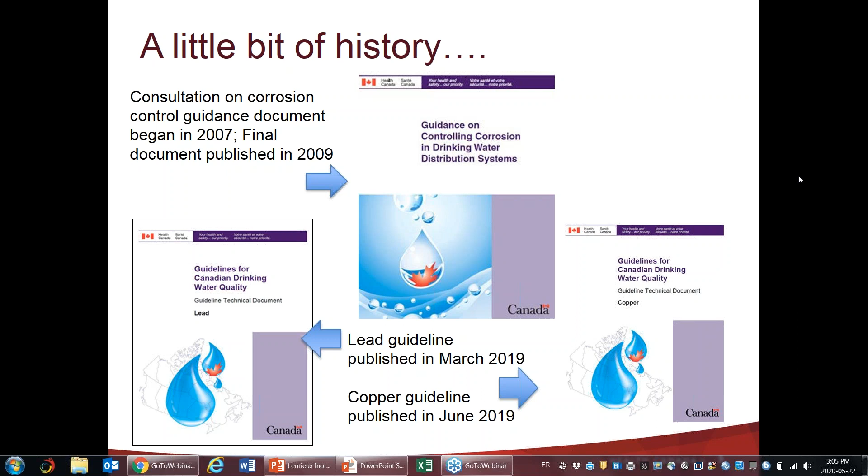Again, sorry, you have to be patient with me.

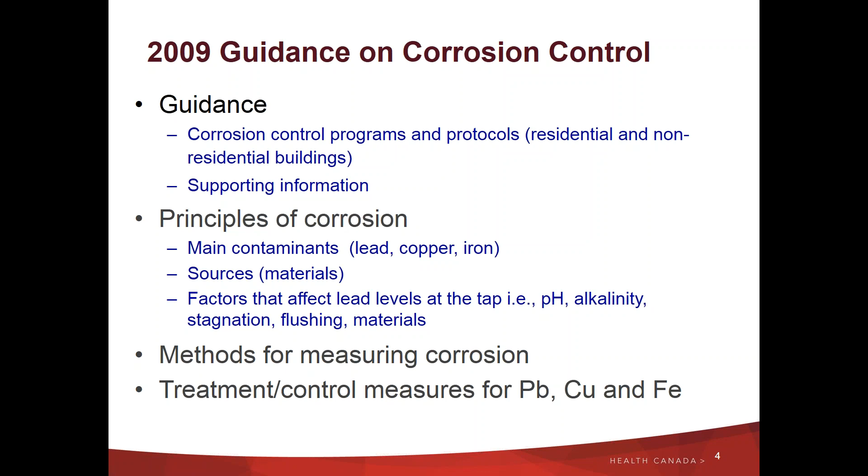So in terms of our 2009 guidance on corrosion control, it provides guidance on corrosion control programs and protocols, including for residential and non-residential buildings, as well as the supporting information behind that. Some of the principles of corrosion, such as the main contaminants that we focus on, which are lead, copper, and iron. We look at the sources, some of the factors that affect lead levels at a tap, for example pH, alkalinity, stagnation, flushing, and the materials, and methods for measuring corrosion, as well as treatment and control measures for lead, copper, and iron.

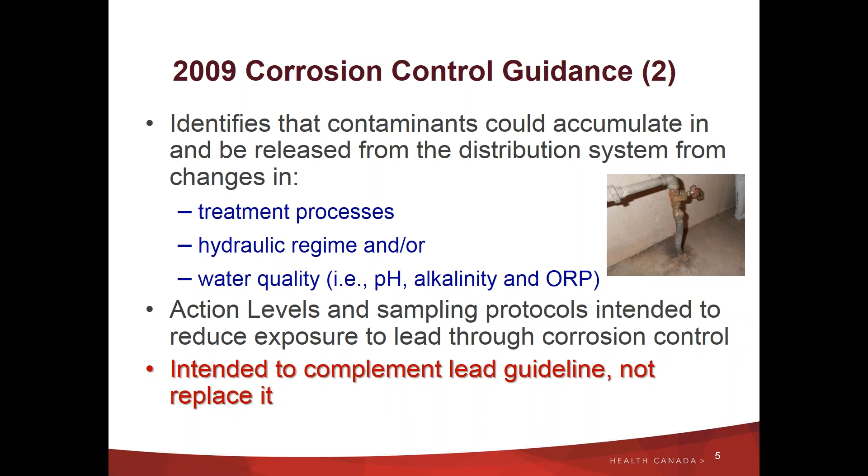The other thing that we've done is identify contaminants that could accumulate and be released from the distribution system, resulting from changes in treatment processes, hydraulic regime, or water quality. We also included some action levels and sampling protocols intended to reduce exposure to lead through corrosion control. So it was not a direct impact on lead in the sense that it wasn't part of a lead guideline, but those action levels and the protocols are intended to try to reduce those lead levels. And then, as I was mentioning, it wasn't intended to replace the guideline. The guidance itself was intended to complement that lead guideline.

And that's key here. In the US, it's a treatment-oriented rule. For us, we have a lead guideline, which is health-based, and we have the corrosion control guidance to help achieve that guideline. So what's driving the need for change here?

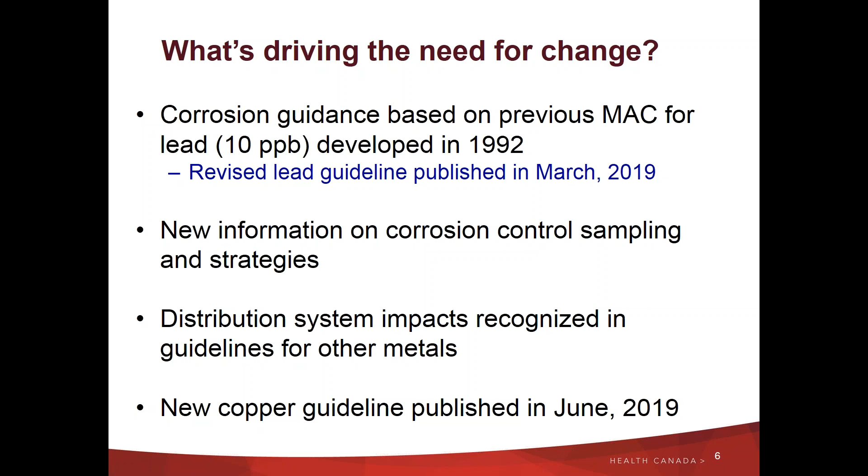Well, our guidance was based on the previous maximum acceptable concentration for lead at 10 micrograms per liter, and that was developed in '92, as I mentioned earlier. And we revised that lead guideline, and that was finally published in March 2019. We have new information on corrosion control sampling and strategies. There are distribution system impacts that were recognized in guidelines for other metals. We had addressed it somewhat in the guidance previously, but there wasn't as much information as there currently is now out there. And there's a new copper guideline, as I mentioned, that was published in June 2019.

So our guideline for lead, we've gone now to a MAC of 5 micrograms per liter, and we're looking at sampling for typical exposure at a populational level. And all of our guidelines are based on a typical exposure. So this is not unusual for lead. It is just the policy decision that was made some time ago for all of our guidelines. That lead guideline includes things like factors affecting exposure, some of the sampling considerations. We address lead variability, and in particular particulate and dissolved lead, as well as some of the monitoring considerations.

Just a little bit of a refresher in terms of the health effects for lead. We're looking at it as being an internationally accepted non-threshold toxicant by many agencies, Health Canada, US EPA, and CDC included. No safe level has been established for lead in children's blood. Lead exposure is associated with many health effects, but decreased IQ is considered the critical effect. I know there is some discussion within EPA, I believe, that there are cardiovascular effects. Those are well known, but the lead exposures that are most critical that we see are from the IQ decrease. It has the strongest evidence for a causal effect, and children have been seen to be affected even at the lowest blood levels that have been studied.

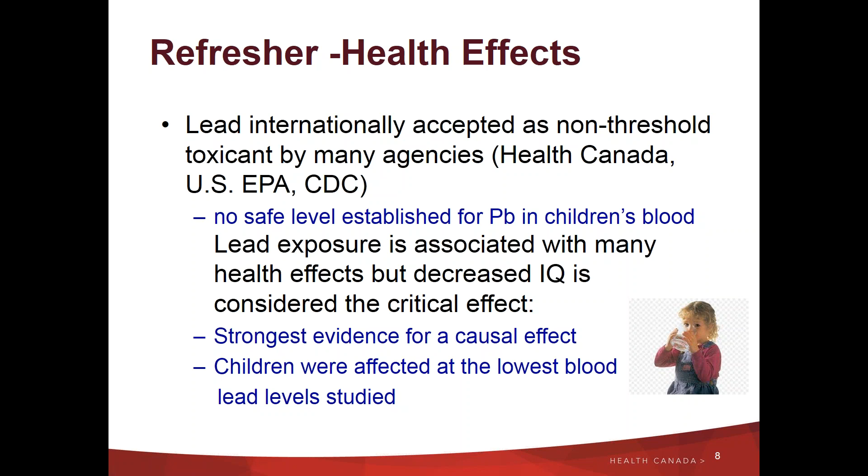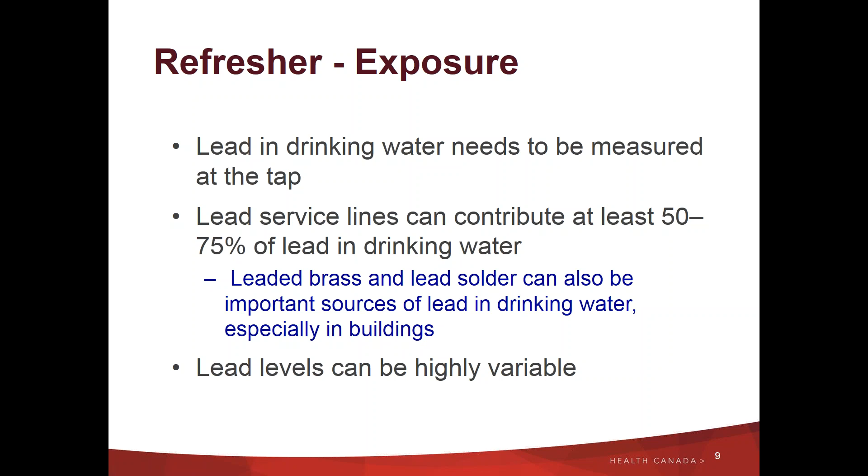In terms of exposure, we know that lead in drinking water needs to be measured at the tap if you want to get an idea of what people are exposed to. It's been published that lead service lines can contribute anywhere from 50 to 75% of lead in drinking water, and sometimes maybe more. But that doesn't exclude leaded brasses and lead solder, which can also have an important impact on the lead concentrations in drinking water, especially in buildings. And lead levels can be highly variable.

In terms of sampling for our lead guideline, we looked at different sampling protocols, and because different sampling protocols will achieve different objectives, you need to think of what it is that you're trying to achieve, because that's the important thing—what are you looking at, what answer are you trying to get? And some of those protocols may actually achieve more than one objective, which is great in some senses and can be confusing to some people in other senses.

Sampling protocols will depend on whether you're looking for exposure, and whether it's an investigative or diagnostic type of sampling, what your treatment performance is like, and compliance may have different sampling objectives than any of those other protocols.

Sampling protocols should also capture the variability of lead because exposure varies, and it needs to capture total lead, both the dissolved and particulate fractions, because if you're ingesting lead, your body does not make that distinction. You have a very acidic environment in which you ingest lead, so the assumption is that there's a potential to absorb all of it, whether particulate or dissolved.

In terms of factors affecting lead release, there are many of them, but typically they vary between particulate and dissolved. Dissolved lead is based on water quality, and quite often the surface area of a lead surface—pipe length, diameter, stagnation time of water. The release of dissolved lead is reasonably well characterized, though not completely.

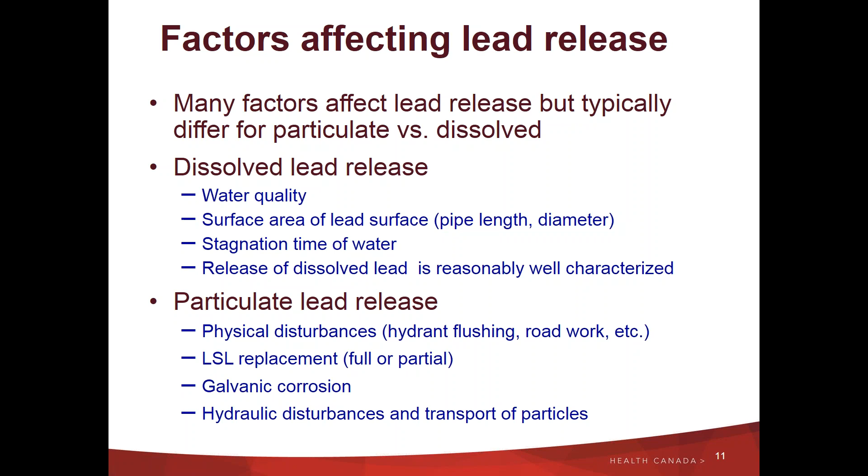Whereas particulate lead release is based mostly on physical disturbances—hydrant flushing, for example, road work, lead service line replacement, whether full or partial, galvanic corrosion, and hydraulic disturbances and the transport of particles. Some of these things seem obvious, but others are not as well characterized, and you may get particulate lead release without any idea why it's happening. So it's less well characterized.

So what are we looking at in terms of our update on the corrosion control guidance? We're looking at protocols for assessing corrosion control. Our primary focus is going to continue to be on lead. It's not the only focus, but it is the primary focus in terms of the protocols themselves.

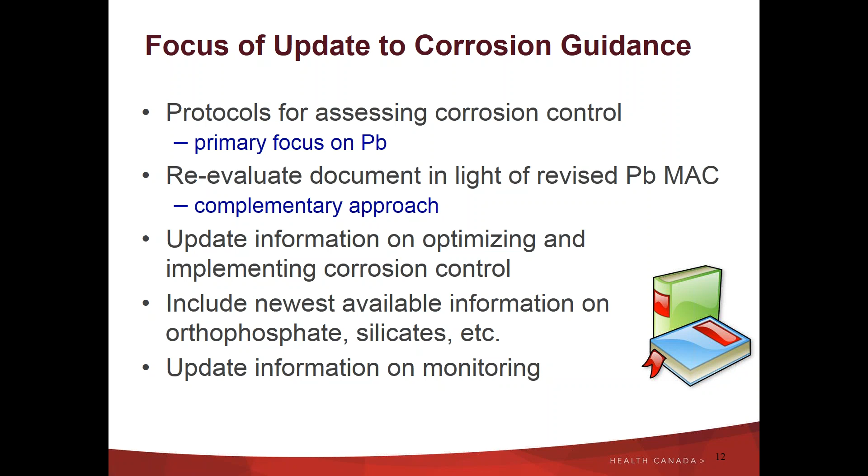We're reevaluating the document in light of the revised lead MAC, so it has to be a complementary approach. We're looking to update the information on optimizing and implementing corrosion control, including the newest available information on orthophosphate, silicates, anything else that's out there, and updating information on monitoring.

We are also looking to see if the 90th percentile action levels are still appropriate. Do we need to relook at them? Are they even something we want to keep? So those are the types of things we're thinking about.

We're looking to update the information on sampling for different objectives. We'll look to expand the random daytime sampling information and the UK experience, because they have a significant amount of information out there on their experience with random daytime sampling.

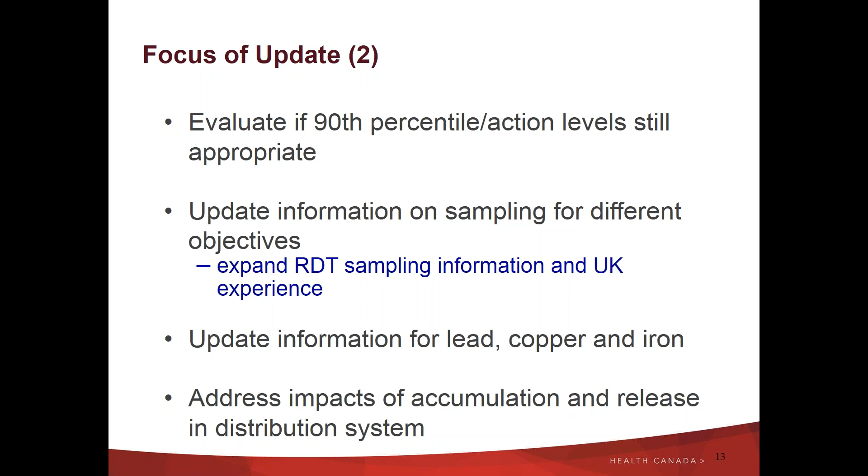We're looking to update information for lead, copper, and iron, because those are three of the contaminants included here that have had a significant number of changes.

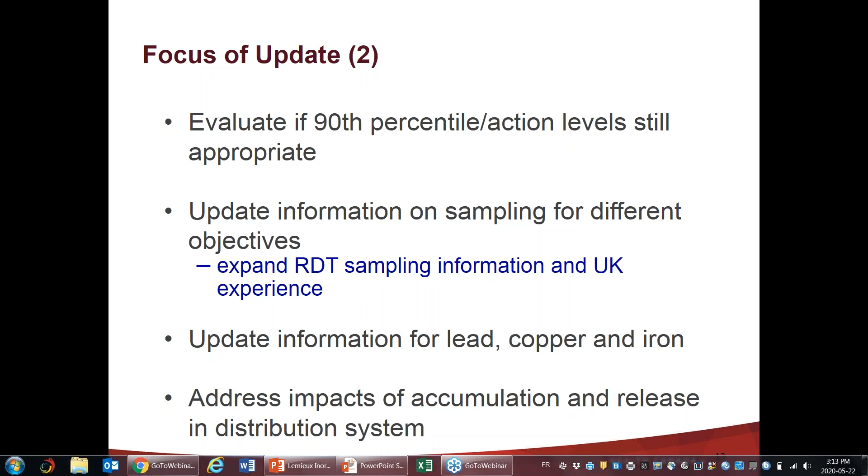We're looking to address impacts of accumulation and release in the distribution system, simply because there has been a significant amount of information come out lately, or in the last few years since we published, that has an impact. We're also looking to make sure we highlight the correlation between particulate lead and metals, and that metals can accumulate on top of iron and lead in the distribution system.

Iron and manganese scales accumulate lead as well, so they can be released after full or partial lead service line replacements, and that's going to be important information to include in that document, as well as the increased release of particulate lead. We have a lot more articles out there, a lot more data that supports that information.

And also getting back to the tenet that red water or discoloration events need to be monitored because they're not innocuous, because of this correlation between the lead and the metals, between the particulate lead and iron in particular. So it's something we've had as a philosophy in the past, to make sure people understood that it's not just iron, but it's been a little bit more low-key, I think, across the board, and we've tried to highlight that a little bit more to make sure people understand it's not just iron that's in there.

So what else are we going to be including in this revision? We're looking to reinforce the need to monitor in the distributed water, that is, at the tap. Again, emphasis on the need to address discoloration events because they are potential indicators of potential release of other contaminants, including radiological and other metals.

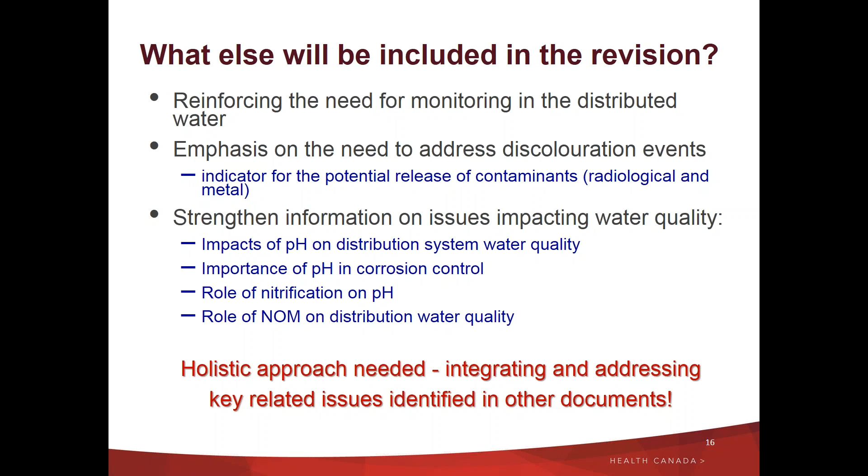Need to strengthen the information on issues that impact water quality—the pH of the distribution system water, the importance of pH in corrosion control, the role of nitrification on pH, which we had previously addressed but I think we need to go back and make sure that's complete, and the role of NOM, the natural organic matter, in water quality.

So really what we're looking at is a holistic approach in addressing these key related issues that have been identified in other documents as we've progressed through them in the past. In terms of monitoring, we're still looking to address residential sites, including single family and multi-dwelling residences.

We need to consider what's practical, what's acceptable by the consumer. We should include buildings and schools, making sure that we're capturing those vulnerable populations. They were previously included, but we're keeping that and adding information that's changed since then. They also have different challenges than a residential setting in terms of fittings, faucets and bubblers that you might have to address.

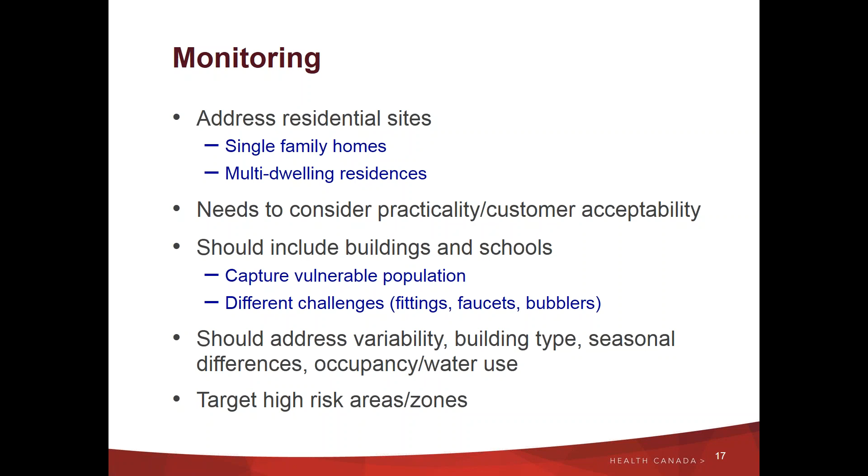Looking to address the variability, the building type, seasonal differences, occupancy, water use, again updating that information in terms of monitoring, and then targeting high risk zones and areas.

In terms of monitoring, looking at the sampling type, the locations and the numbers to identify priority sites and locations. Homes with lead service lines, whether full or partial, need to be prioritized. Provide guidance on site selection when you can't sample at homes with lead service lines.

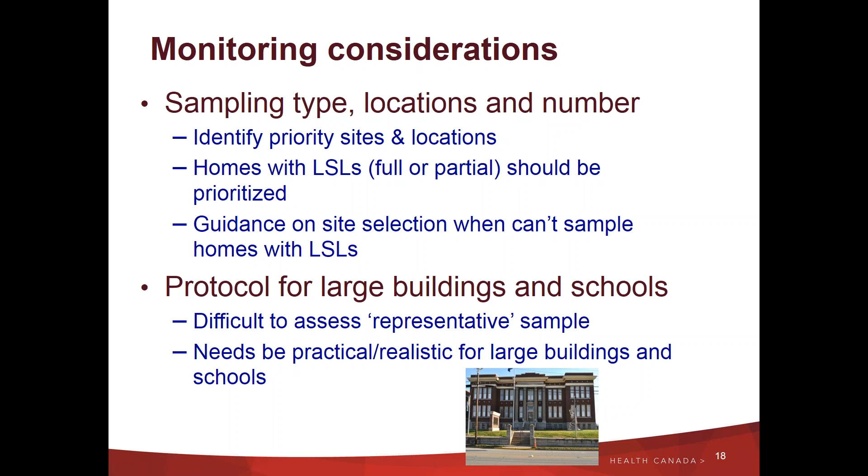Protocol for large buildings and schools. Large buildings - I'm not talking about office buildings. We're not looking to drive corrosion control just for a larger office building, but some of these buildings have children in them, so we're looking to make sure that they're captured where they need to be. But in the concept of the lead guideline, we found it difficult to assess a representative sample, so it's one of those things we need to make sure we're doing a good job with respect to corrosion control. Again, it has to be realistic and practical for these larger buildings.

In terms of sampling results, we're trying to address that in the guidance document and help people understand that what a sample result can tell you really depends on how it was taken - whether it was a 6-hour first or second draw, 30 minutes first or second draw, 5-minute flush sample, randomly timed, or a profiling sample. They all achieve different objectives when you do those types of sampling.

And then we'll be looking at strategies to reduce lead. Obviously the big driver is full lead service line replacement as the best approach, recognizing that it's not feasible to do in a very short period of time. This is a long-term plan.

Partial lead service line replacement can reduce lead, and we want to make sure we get that message across - it may cause release of lead for several months afterwards, and that reduction might not mirror the percentage of line removal. So if you remove 50% of your lead service line, that does not necessarily mean you will get a 50% reduction in the lead concentration you get at the tap. So those key messages need to get across to make sure we try to promote full lead service line replacement as best as we can.

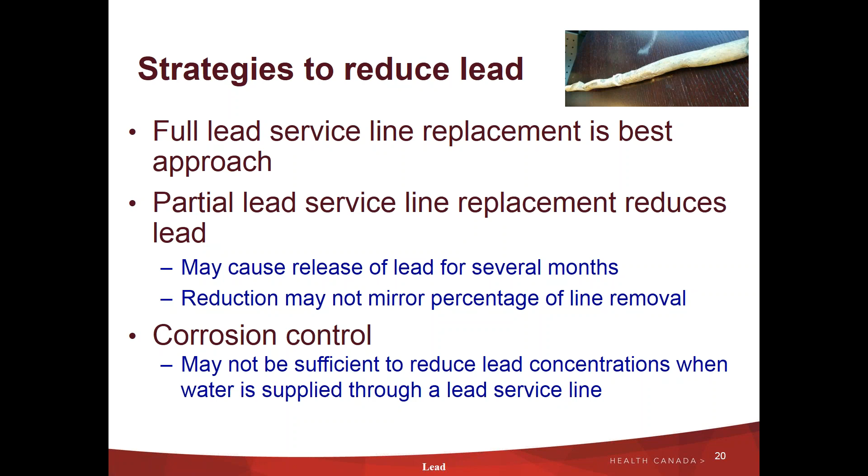In terms of corrosion control, there's recognition that it works reasonably well for a lot of situations, but in some cases it may not be sufficient to reduce lead concentrations when water is supplied through a lead service line. We know this is a very challenging situation and a very challenging thing to do, and we're trying to make sure people understand there are things they can do. The guidance will try to capture those essential elements, but sometimes it may or may not work depending on the water quality and a number of other factors.

Other things we've recognized in terms of strategies for reducing lead - sometimes you may have to go to things like low lead materials, which can be costly and difficult. So it's not our first go-to, but it's part of the strategy going forward, things they can look at to see what they can do to reduce exposure to lead.

We've recognized that filters work well. They are a temporary measure, and they need to be certified by a third party as meeting the appropriate standard for reducing lead under the NSF set of standards. For those not aware, the NSF standard now includes a reduction to 5 micrograms per liter of lead or less. We were able to get that as a committee change to mirror things going on in both Canada and the EU, driving towards lower levels, and also with respect to issues happening in the US, people wanted filters that would reduce lead levels lower. The key messaging, of course, is that maintenance of these filters is essential.

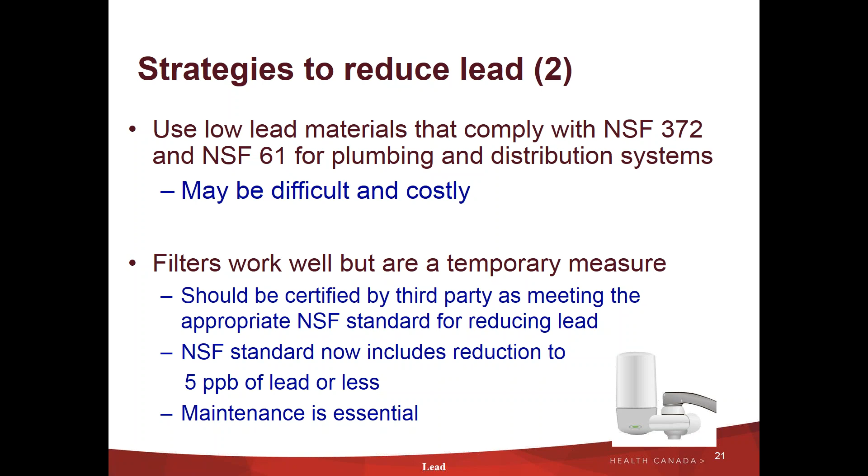So what's next? We're hoping to get a document out to public consultation in early 2021, and we're working on the revision of the guideline, which is expected to start sometime in late 2021.

So we're not there yet, and I say guideline because I'm not sure if it's actually going to have a health-based number or not, but it may be a guidance document. It will depend on whether there are any health effects identified. At this point in time, it doesn't appear to be a driver, but I use that as a generic term, an iron guideline. We'll leave questions for afterwards.

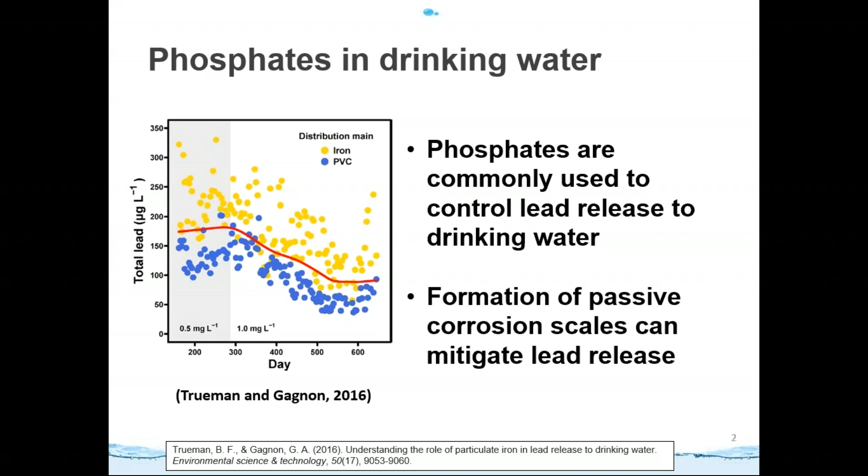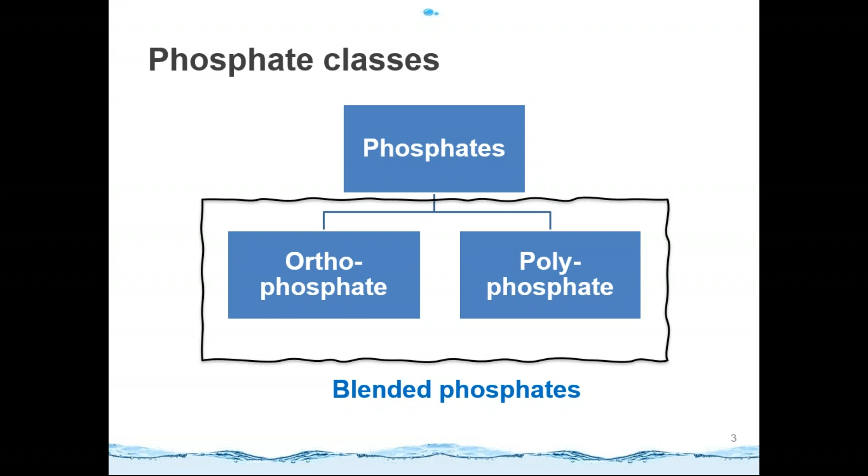As we know, phosphate has been widely used in corrosion control in the drinking water industry, and the major mechanism is to form a passive corrosion scale on the surface of the lead pipe. When we talk about phosphate, in general it can be divided into two categories: the first is orthophosphate, and the second is polyphosphate. In commercial products, we call it blended phosphate. Orthophosphate contains only one orthophosphate unit.

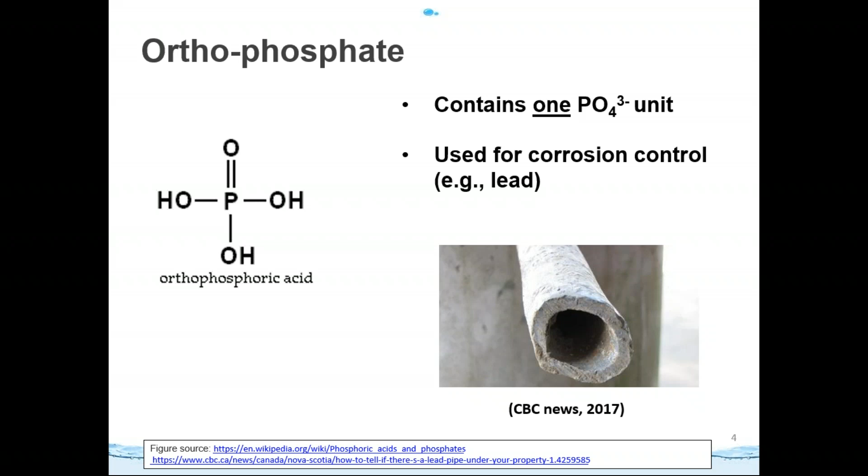Orthophosphate is commonly used for corrosion control. But polyphosphate has a lot of different species, and it contains several orthophosphate units, and it's usually used for sequestration to solve color or turbidity problems caused by iron and manganese. But the disadvantage of using polyphosphate is that it may increase lead release through complexing lead with the polyphosphate molecule.

So to the sodium silicate: sodium silicate is well understood for sequestering in drinking water, like the color and turbidity problems caused by iron and manganese. But sometimes water utilities also use sodium silicate to mitigate lead release. But due to very limited data and studies, sodium silicate is not widely used in the drinking water industry, especially for corrosion control.

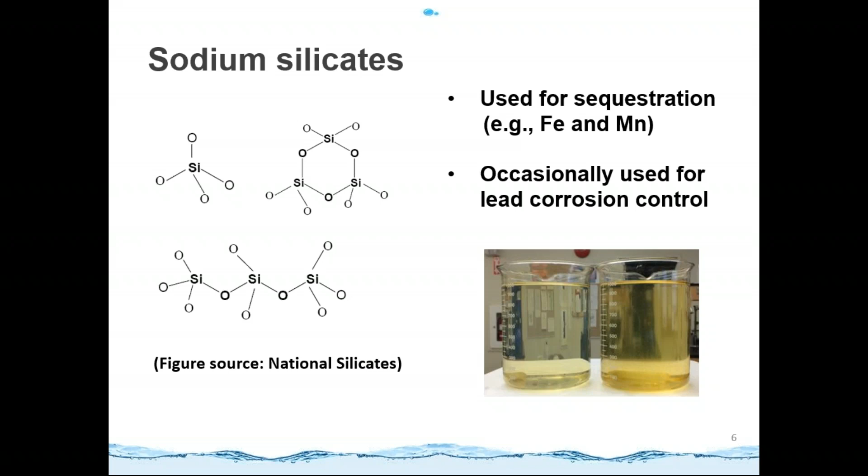After carefully reviewing the literature in the past, we find some studies report positive results, but some studies report negative results. For example, in 2005, Schock reported they observed a decrease in lead release by 55 to 95% when they switched the corrosion inhibitor from polyphosphate to sodium silicate.

And Woszczynski in Halifax reported that when she compared the lead concentration in the sodium silicate treated system, she found the lead concentration was relatively high compared with the orthophosphate treated system. So in general, I think the discussion about the application of sodium silicate is controversial in the literature.

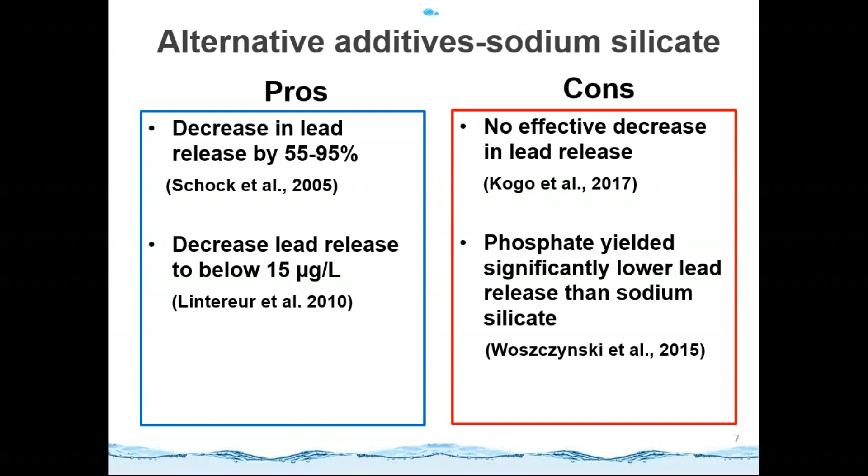In recent years, we can see some news about failures of distribution systems using sodium silicate. For example, in Newark, New Jersey, the local water utility used sodium silicate as a corrosion inhibitor to mitigate lead release from the mid-1990s. But even after a couple of decades of use, the exact mechanism of sodium silicate is still unknown.

So water experts think there are two possible mechanisms. The first is that sodium silicate can form a thin gel-like layer, a protective coating on the surface of the lead pipe, which can prevent lead release. Another hypothesis is that when we dose the sodium silicate, it will definitely increase the water pH, which can decrease the solubility of lead carbonate in most conditions.

So the objective of my study is to evaluate the effect of sodium silicate on lead release, and we compare the data with the orthophosphate treated system, which is the well-established corrosion control strategy. We also investigate silicate's impact on the distribution system as a whole.

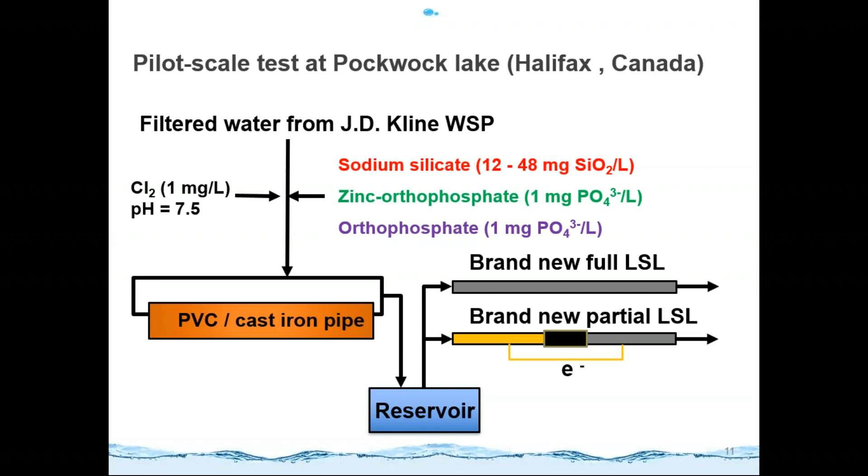This is our experiment setup. As we can see, there are 12 lead pipes: 6 full lead service pipes and 6 partial lead service pipes. Using this experiment design, we can identify the difference caused by the cast iron pipe versus the PVC pipe, and we can also tell the difference caused by different corrosion inhibitors. At the same time, we can investigate the difference caused by the partial lead service pipe versus the full lead service pipe.

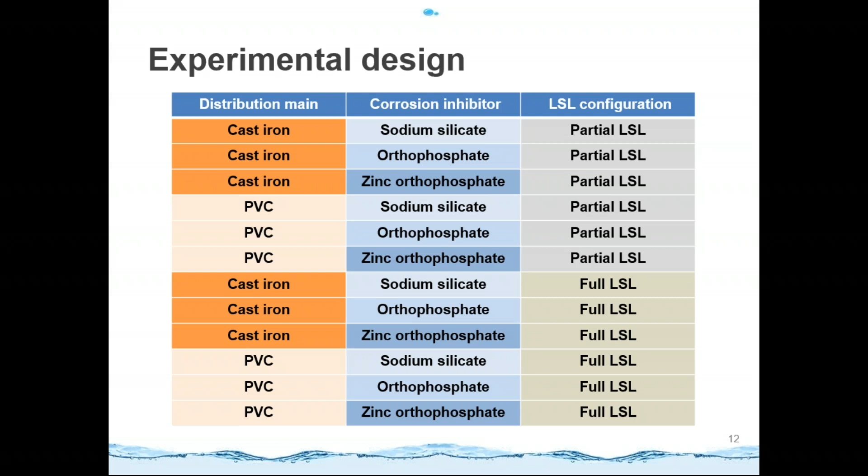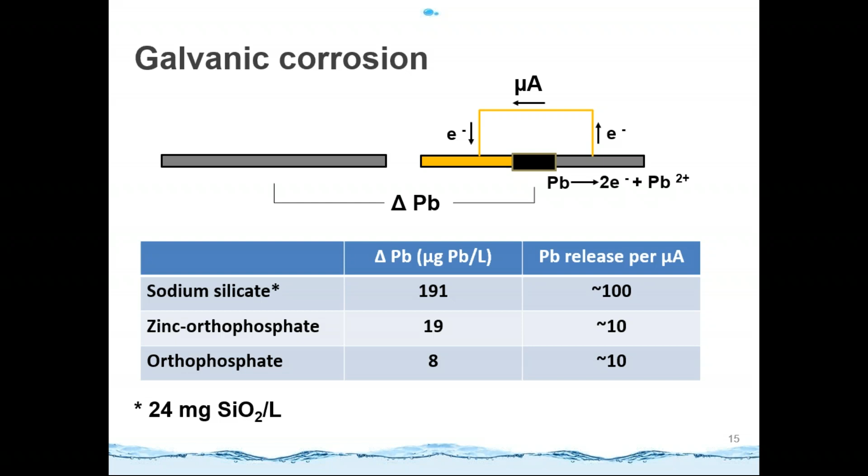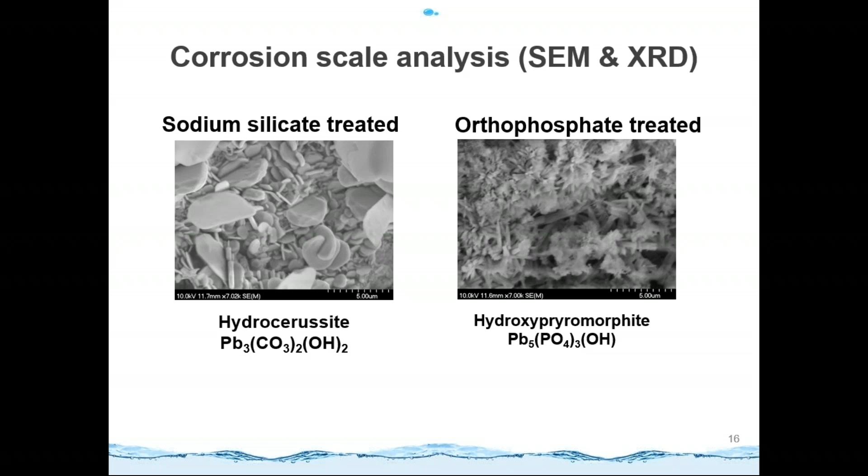So it gives us a bulk characterization of the corrosion scale, but it cannot detect the very top surface of the material. On the other hand, the XPS can detect nanometer-level depths, so it can tell us very good information on the top surface of the corrosion scale, helping us have a comprehensive understanding of the water and solid interface.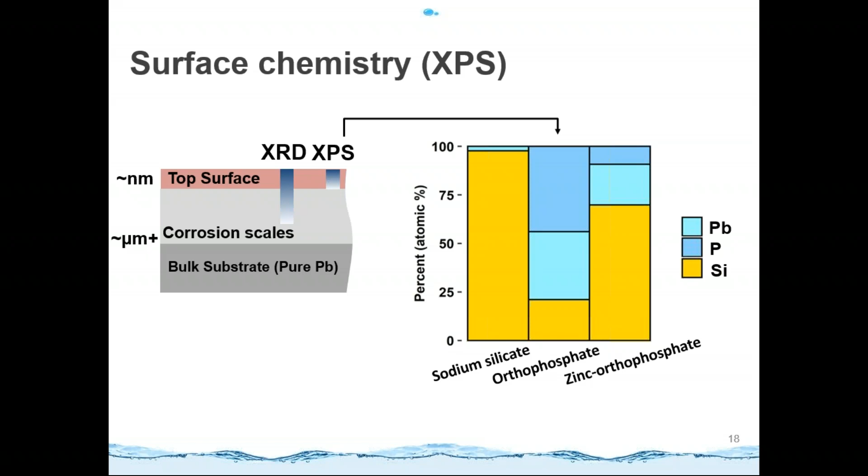But I have to mention that due to the lead concentration data we got, we do not have any evidence to say that silicon-rich coatings can mitigate lead release. So then we tried to investigate the impact of the dosage of silicon on lead release. We compared the lead concentration at 24 milligrams silicon dioxide per liter and 48 milligrams silicon dioxide per liter.

The result is surprising because when we increase the sodium silicate dosage, we observed an increase in lead and iron. As we can see from this table, for the cast iron supplied lead pipe, the increase in lead was 505 micrograms per liter, and we observed an increase in iron of 81 micrograms per liter. But for the PVC supplied lead pipes, the increase in lead and iron was relatively lower, at 103 micrograms lead per liter and 23 micrograms iron per liter.

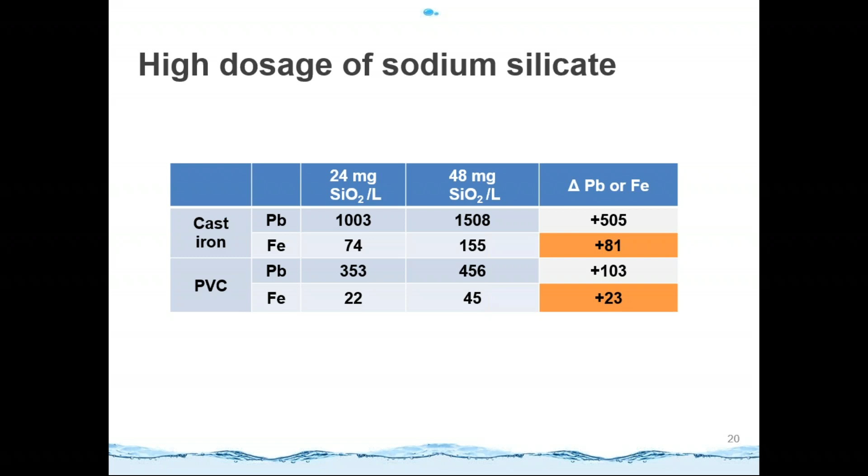So we suppose that the dispersal of colloidal particles from the corrosion scale deposit in the pipe loop system is the reason that caused the increase in lead and iron. So we used another tool, called field flow fractionation, which can separate the colloids depending on particle size, separating dissolved lead from colloidal or particulate lead.

As we can see in the figure on the left, the red dashed line is the signal of lead or iron from the zinc orthophosphate treated system. We can see there is no signal of colloidal iron or lead. But in the presence of sodium silicate, we can see two significant peaks of colloidal iron and lead. The blue peak is colloidal iron, and the orange peak is colloidal lead.

The size range is from 10 kilodaltons to 1 million daltons. So it is obvious that we did observe a high concentration of colloidal iron and lead at the high dosage of sodium silicate.

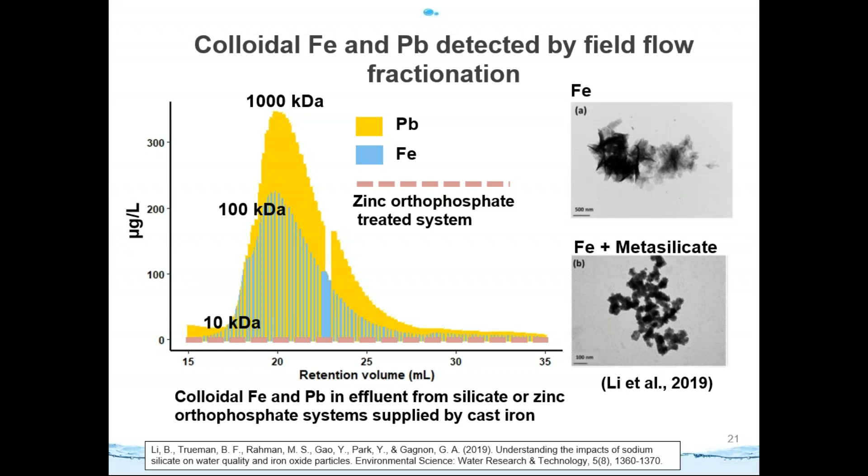So in our previous study, I cite two figures from the literature, where we find that the presence of sodium silicate can increase the dispersal of iron. So we suppose that when we overdose sodium silicate, the increased dispersal of iron can result in high lead and iron concentration in the effluent of the municipal pipe system. Also, colloidal iron has a stronger correlation with elevated lead release in full or partial lead service lines. So let's go to the summary.

This is independent of pH, because in our study we always maintained the pH of our system at 7.5. So at the same pH levels, sodium silicate cannot maintain lead concentration at an acceptable level, especially compared with the orthophosphate treated system. We did observe a thin silicon-rich coating at a nanometer level, but the silicon does not appear to form a protective corrosion scale like lead silicon solids would with lead directly.

So for high dosage of sodium silicate, overdosing may increase colloidal iron and lead, so it's quite important for sequestration or lead release control, especially with huge impact in systems containing unlined cast iron pipe. Because in our study we used brand new lead pipe, we suppose it's still worth investigating the impact of sodium silicate on recovered lead pipe, which are rich in non-lead species such as aluminum, calcium, or magnesium.

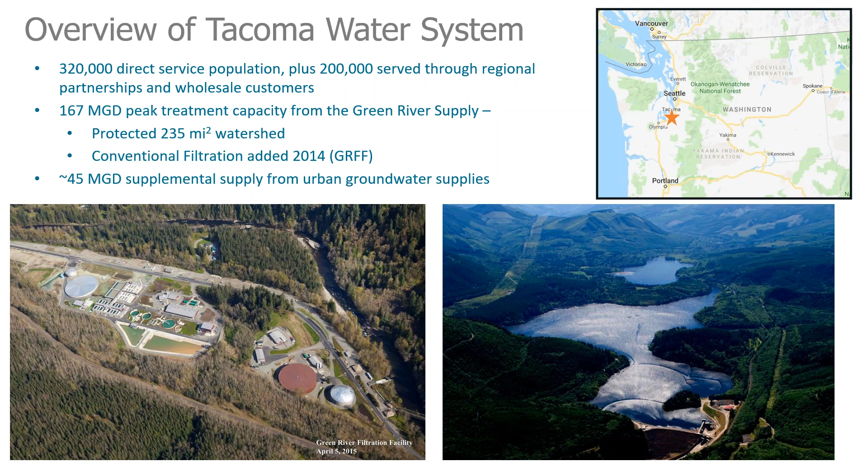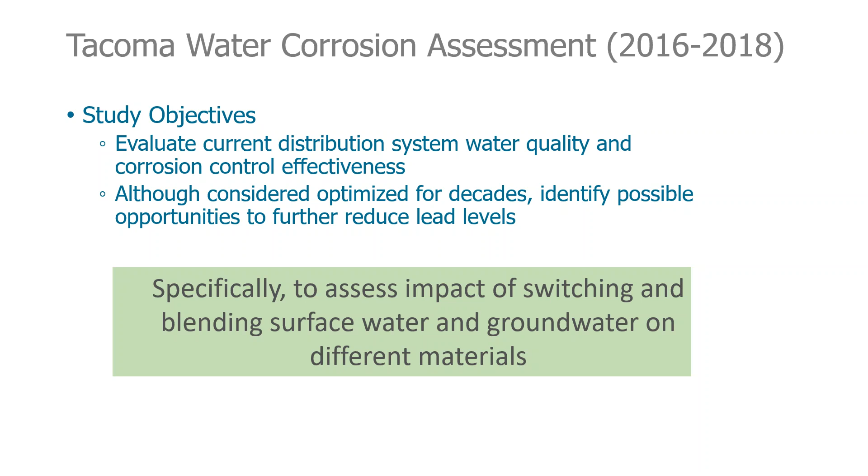Tacoma supplements their Green River supply with groundwater located in town, and that was sort of the focus of the study, was to understand how switching between surface water and groundwater might be impacting lead release. The study was initiated in 2016 in the aftermath of Flint, when many utilities were proactively wanting to further understand the effectiveness of their corrosion control strategies and identify opportunities to further reduce lead levels. So this issue of switching back and forth was on Tacoma's mind and the focus of the study.

This graph shows the history of 90th percentile lead levels in the tall blue bars. We can see looking across the decades that there were periods when the results were a little uncomfortably close to the 15 microgram per liter action level, with some looking for opportunities to improve. But when we look all the way to 2016, we see very low results of 2.1. This was post-filtration, after covering some open reservoirs, and activities that resulted in increased pH and chlorine residual throughout the distribution system. So many factors potentially contributing to those low numbers, but there was a lot of interest if that was real and sustainable and could be improved upon.

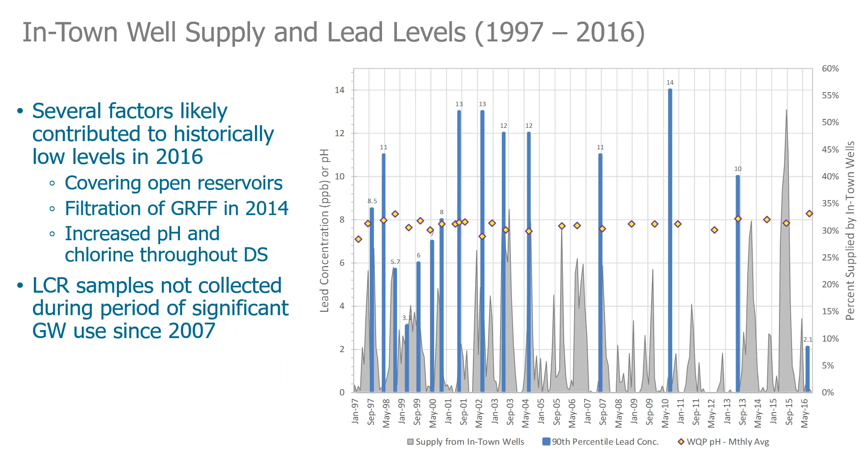You'll also notice that lead and copper rule sampling had not been conducted during times of significant groundwater use, which is shown by the gray points in time. So we couldn't do a retrospective analysis to determine the impacts of groundwater on 90th percentile levels, hence the need for the pilot study.

This map shows again the overall Tacoma system. The Green River filter plant is way out here, with large pipelines bringing the surface water in, and these red dots show where various wells are located in town. This large grouping of wells, the South Tacoma wells, can actually all be fed together to the north, or some can break off to the south, and depending on which wells are operating, we can get different water chemistry out of that well field.

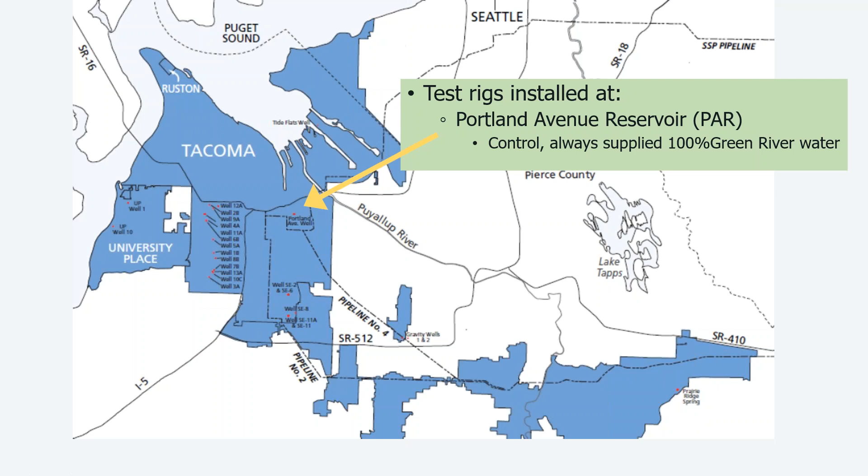To try to understand the impact of groundwater and surface water, 3 different pipe rigs were constructed. One test rig was installed at the Portland Avenue Reservoir, and this area always received 100% Green River surface water, so that was meant to be the control location. The second rig was installed at the Hood Street Reservoir Chlorine building, where we could actually control whether the rigs would get 100% surface water or 100% well water. The groundwater from this grouping of wells comes through, and at this facility it's pH adjusted, so the pH could also be controlled going into the pilot rig.

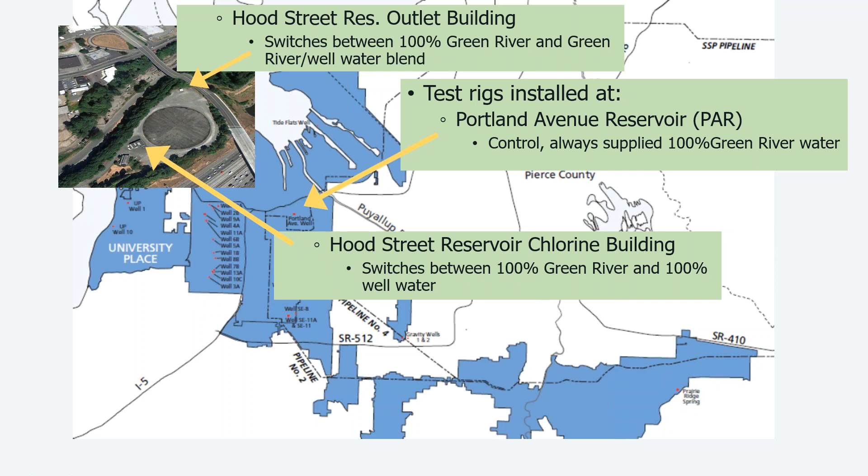Then the water goes into the Hood Street Reservoir, where a third rig was located at the outlet of the reservoir, where it could look at either 100% surface water or whatever blend was coming out of the reservoir. The majority of my talk is going to focus on the pipe rigs located here, where the switching was between 100% surface water and 100% well water.

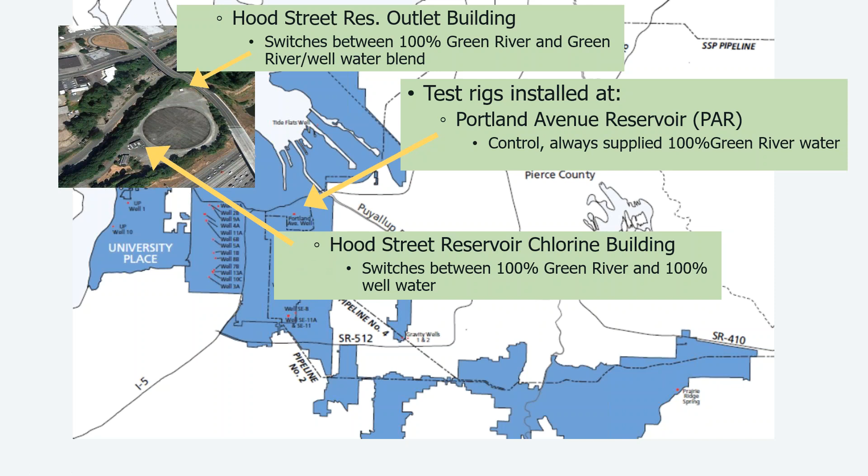Here's a look at the pipe rigs installed at the Hood Street location. Each of the pipe rigs consisted of harvested brass meters, copper pipe, and lead goosenecks.

The City of Tacoma does not have lead service lines, but at the time it was estimated there were around 1,200 goosenecks, mostly installed in the 1920s, and the city has been actively locating and replacing them.

So these were an area of focus of the study, to see how the lead was behaving in the switching of water chemistries.

At Hood Street, the test was set up so that in phase 1, the entire test rig was equilibrated to the surface water, which had a pH of about 8.1. After phase 1, one brass meter, one copper pipe, and one lead gooseneck were harvested and sent to University of Washington for scale analysis.

Then the entire rig was equilibrated to groundwater that was treated to a pH of approximately 7.4, and another set of materials was harvested and sent to University of Washington for scale analysis.

Then on this rig, it was converted all the way back to surface water, and then we did a final phase of groundwater treated at pH 7.8.

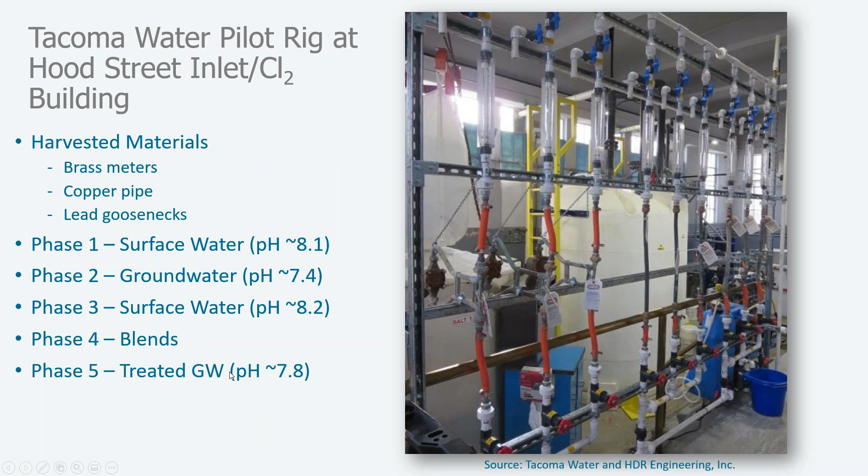Here's a look at the chemistry, the general conditions that occurred during the testing at Hood Street. A couple things to point out: the pH difference we talked about, between 8.1 and 7.4 to 7.8, were the two treatment endpoints.

The chlorine was pretty high at this location, and that's going to impact our results, which I'll talk about. I also want to point out the difference in alkalinity and dissolved inorganic carbon, the DIC. Quite a difference. This is very typical of Pacific Northwest waters, where we have soft, poorly buffered, low mineral surface waters coming from those watersheds, and then more mineralized groundwaters.

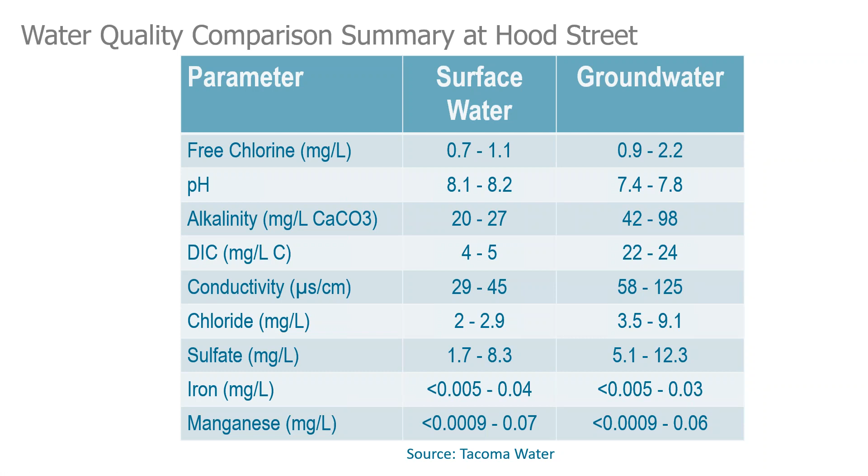It's also important to note that there's very low iron in either of the supplies, and a bit of manganese, depending on which wells are operating, with sometimes seasonal manganese that comes out of the surface water supply.

Here's a classic solubility curve generated for these two waters. The green line shows the solubility of lead as a function of pH in a low DIC water, at a DIC of 4.8, and the blue line shows the theoretical solubility of lead for the groundwaters. Because the DICs are different, lead isn't just a function of pH—the DIC really matters. We wouldn't want to match the pHs.

If we just set pH to 7.5, the groundwater would have lower solubility than the surface water, and at high pHs, the surface water is lower than the groundwater. But we're actually forming different lead species at these pHs because of the DIC.

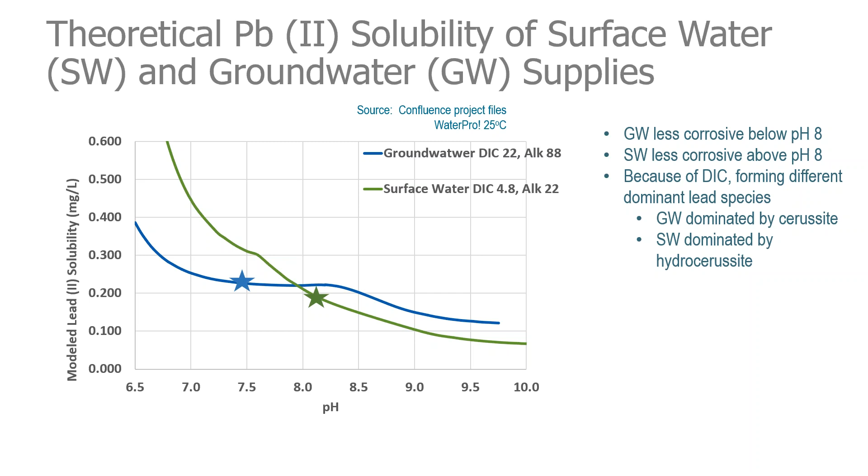The groundwater is dominated by cerussite, which is a lead carbonate, and as you can see in this picture, it almost looks like quartz crystals—I took these from the internet, nice photos. The surface water forms hydrocerussite, a lead hydroxycarbonate, with a much more platy, flat crystalline structure, which Bofu also showed a photo of in his presentation.

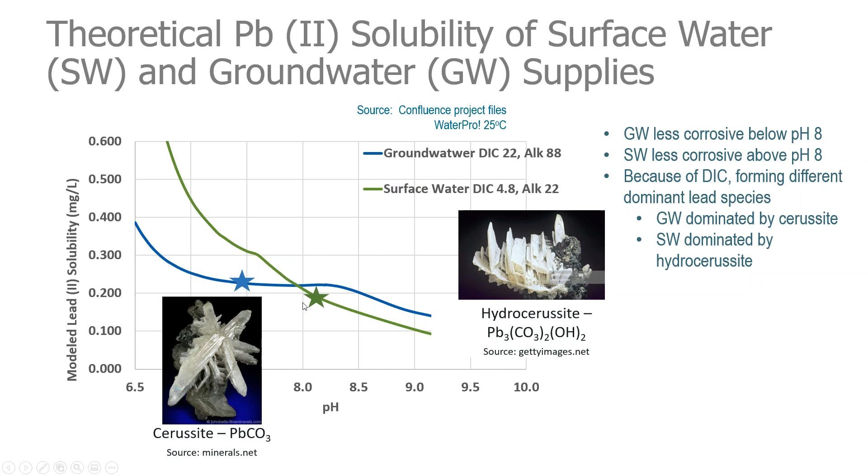So we're actually forming different lead minerals depending on which water is being served. That's what the solubility modeling predicts, and in fact, that's what we saw in the pilot rigs, as we'll get to.

This diagram shows the results from the control rig, from one of the goosenecks located at the control station that received surface water the entire time. The black bars represent phases of changes that occurred at other locations, but not here—this is surface water the entire time. The red bars are dissolved lead, the blue bars are total lead, so the difference is particulate lead.

Generally we had decent replications across the many weeks, around 9 months of testing, with dissolved lead typically around 10 or under, and variability in particulate lead. So this is the control—no changes.

This is some of the difficulty sometimes in working with pilot rigs: we do get variability even in our control rigs, which can make it difficult to compare to test rigs. But it's very important to have one control where nothing changes, so you can see how it behaves based on seasonal changes or operations that happen over the 9-month period.

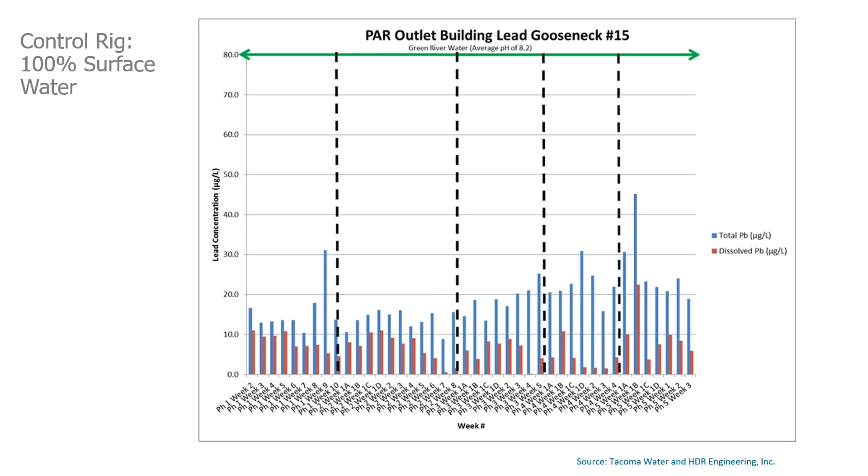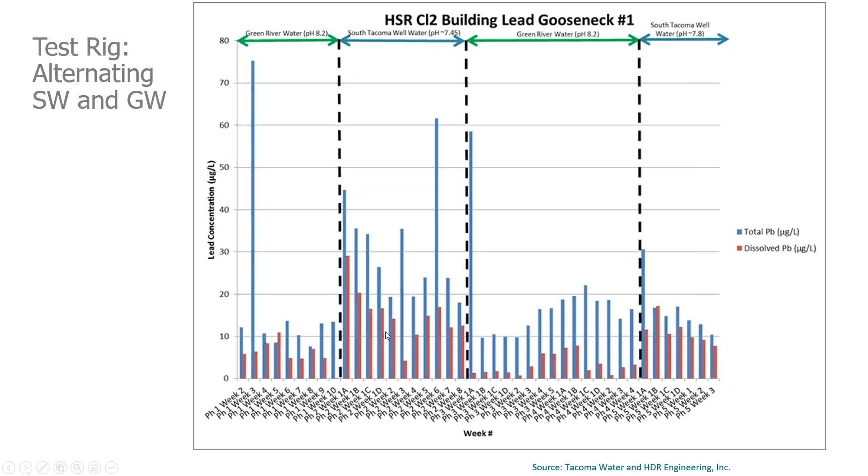Can't really explain why dissolved lead was so low here. We did see lower dissolved lead in the control at that time too, but still more particulate than when we started. And then when we switched back to groundwater, again a big particulate release and slightly lower dissolved lead at pH 7.8. This is again the higher groundwater, slightly better than what we saw at pH 7.4. So we see the actual results of these changes going from groundwater to surface water, particulate release, and scale predicted to be due to changes in the mineral structures.

So how does this compare to our desktop theory, just in terms of lead solubility? The blue, whether it's triangles or diamonds, these are all groundwater, and the green is the surface water. We see pretty much the trend that was expected, of the groundwater being higher lead release than the surface water at those pHs. We generally see that trend.

But if we look just within the groundwater, which is just the blue, it's pretty flat line lead release across this whole pH range, 7.3, 7.4, all the way up to almost 8. It's pretty flat line, which is what theory would predict for the cerussite groundwater at this DIC level. There's maybe some improvement, but it's pretty flatlined.

There were a few days when the wells were operating and a low DIC groundwater came into the plant, DIC down to 10, and that behaved almost more like a surface water with that low DIC, and we do see significant lead reduction at the higher pH. But for the higher DIC waters, it's some improvement, but not much.

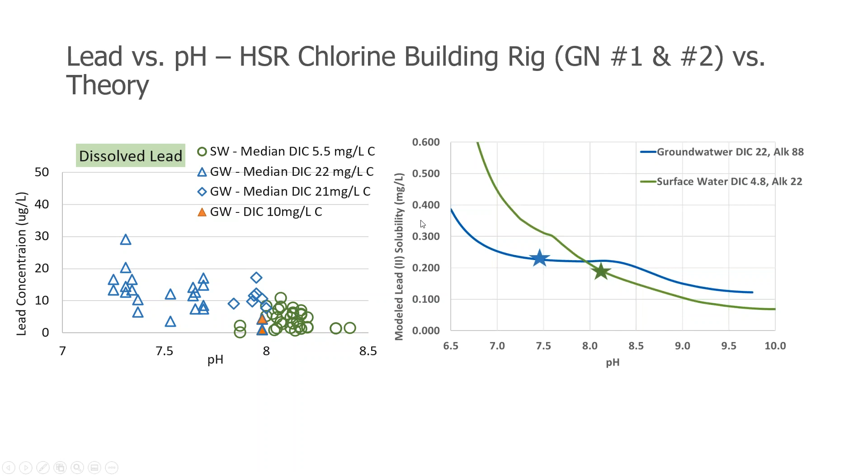So it really did perform quite similar to how it would be predicted by the solubility. Again, this is just in terms of trends. The numbers in the solubility models are often much higher predicted. They assume equilibrium with pure lead surfaces and infinite contact time and all that kind of thing. So we get much higher numbers, but the trends are what we look for on the solubility models.

Now there's another variable we have to add in, and that's oxidation reduction potential. We talk about that a lot. We use the Pourbaix diagrams to look at oxidation reduction potential, DIC, and pH. These diagrams help us understand the thermodynamically stable minerals, the species of the metals that are thermodynamically stable under certain conditions. They don't tell us anything about concentration. They don't tell us anything about kinetics. It's just what you might expect to see given the conditions. So it's a function of pH, and this is actually voltage potential. This is...

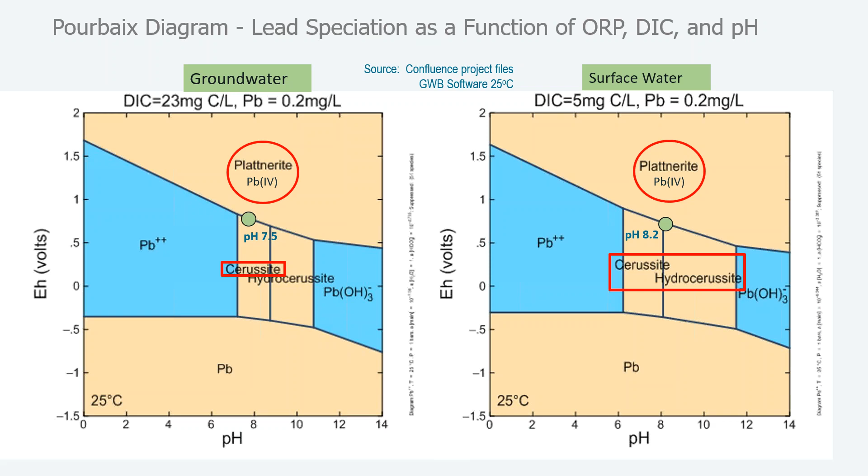So maybe this helps explain why Tacoma's lead levels were so low in last monitoring, when they were able to have higher pH and more chlorine, and why we're seeing pretty low lead levels coming off of those pilot rigs as well.

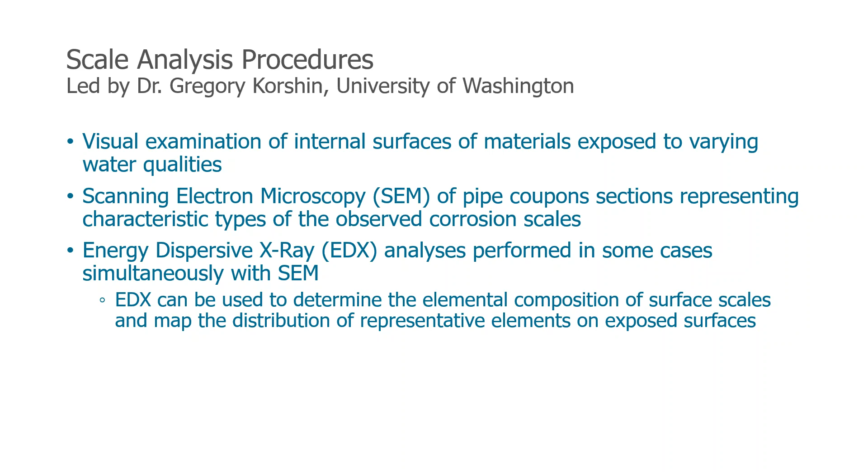So then to tie some of the pieces together, scale analysis was done when the sections were sent to University of Washington for visual examination, just to see how the internal surfaces appeared. Also to do scanning electron microscopy to look at some of the mineral phases and characteristics of the corrosion scales, and EDX work was done to determine the elemental composition of the scales.

In terms of visual examination, phase 1 on top is one of the lead goosenecks cut in half, and phase 2, where it's all groundwater, we can visually see that the scales had changed and were quite different.

What we see in phase 1 is whitish gray, and in phase 2, whitish grayish colors, typically the lead carbonates, cerussite and hydrocerussite. The brownish orange colors, while they may well be iron or manganese, in this case that's actually lead IV, which can appear as a brownish color.

Through the EDX work that was done, it was determined that the vast majority of the mineral compounds were lead, carbon, and oxygen, with very low percentages of iron and manganese. So this was thought to be lead IV.

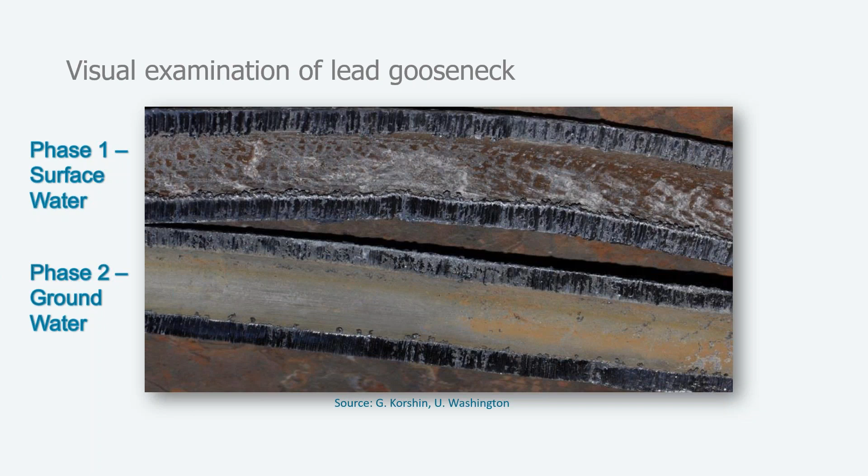When we look closer in at the scales, this is at 1,000 times magnification and 5,000 times magnification. We do see these beautiful, perfect hydrocerussite crystals that form during phase 1, which is expected with the surface water, and on top of it is the lead IV being formed.

I thought this was just so interesting because the lead IV is actually formed as chlorine oxidizes the hydrocerussite scale. So that's exactly what's happening with the chlorine on top of these scales, forming a lead IV coating, which reduces the solubility of the lead.

Then under phase 2, the scales had to change over. We still see some hydrocerussite formation, but we see the development of cerussite crystals and minerals, which when exposed to the higher DIC groundwater were predicted. These are more soluble at the pH they were at, so that's why we saw higher lead release. We saw higher particulate release as the scales had to change their crystalline structure in exposure to the different chemistries.

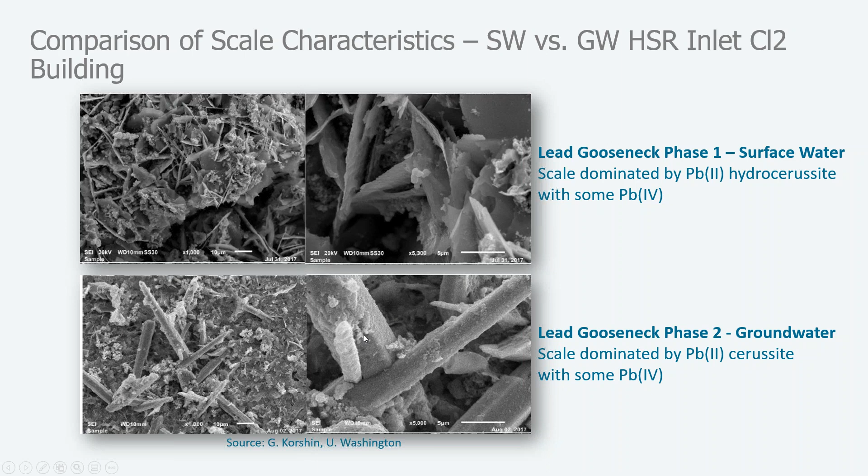Here's just one more picture from the control building, of the pipe loop there, pipe coupon. You can see it looked very similar to phase 1 from the Hood Street building, where we had a lot of lead IV in the presence of, in this case, hydrocerussite, and you can see very clearly the crystalline hydrocerussite and all this lead IV forming around and depositing around the scale. I included this picture because after 100 plus years of being unfiltered, there are some diatoms trapped in the scale, so it's sort of interesting to see.

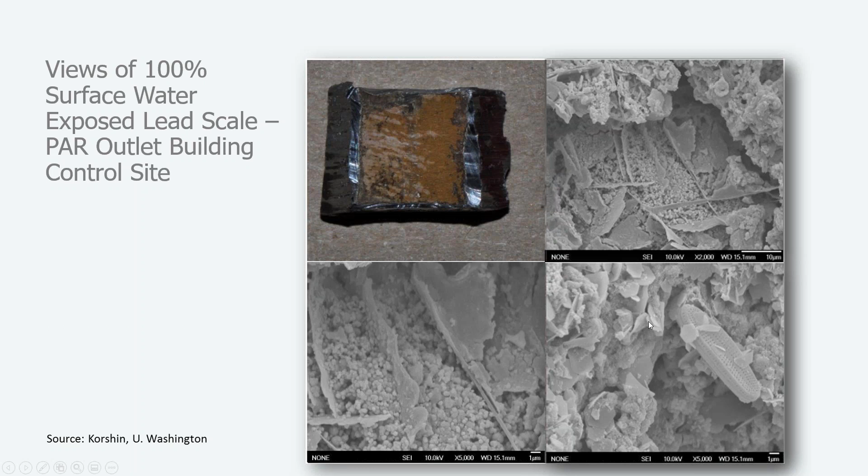So now just an update on where Tacoma is now. Since this study, Tacoma had targeted a pH of 8.4 for the surface water, sliding the star down a bit to be even lower on the lead solubility curve, and a groundwater pH of 7.8, just to ensure they're in the flattest part of the curve.

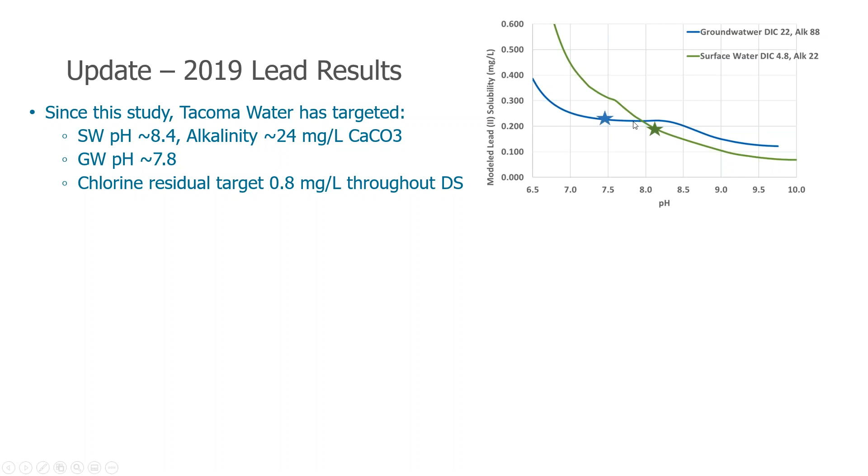They've been targeting a chlorine residual of 0.8 through the distribution system, and in their 2019 monitoring, the 90th percentiles were non-detect for both lead and copper, which is really amazing. That means their 90th percentile was less than 1 part per billion for lead, and of the 51 samples, only 4 had detections. The highest detected value was 4.8.

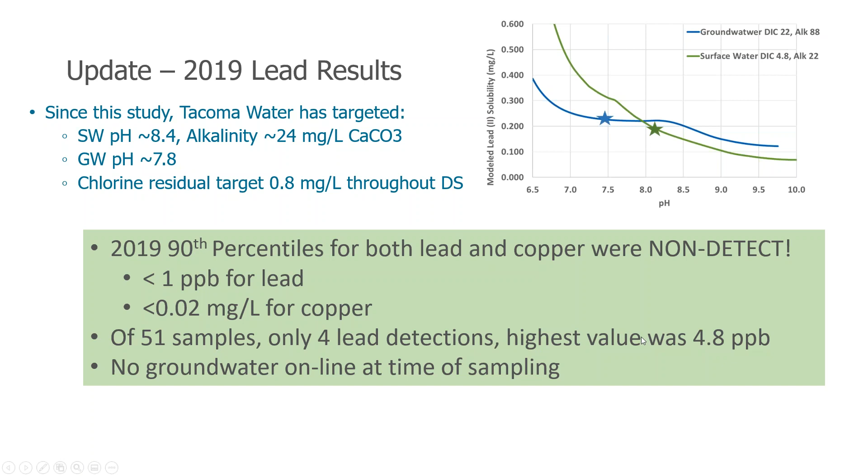Now, once again, because of operations, there was no groundwater on at the time of sampling, but I think the city can be rest assured that they've optimized the treatment between targeting the pH and chlorine for the DIC of their groundwater, so that levels will be as low as they can go, and they're truly optimized.

So to summarize key findings and recommendations: switching between surface water and groundwater can impact lead release. It impacts the lead speciation and can increase particulate release. We have to really understand that this is important. It's very difficult to ever reach equilibrium if we're switching often, so wherever we can provide consistent supplies and avoid that switching, it's really going to benefit our corrosion scales.

It's not enough, or even necessarily appropriate, to just try to match pH. Groundwaters and surface waters will form different mineral species depending on DIC and ORP, so it's not just about pH. Now, of course, stable pH is very important for many distribution system reactions, and it should be a goal within a certain supply area or zone to maintain as stable a pH as possible. But for corrosion scales, we have to think about more than just pH.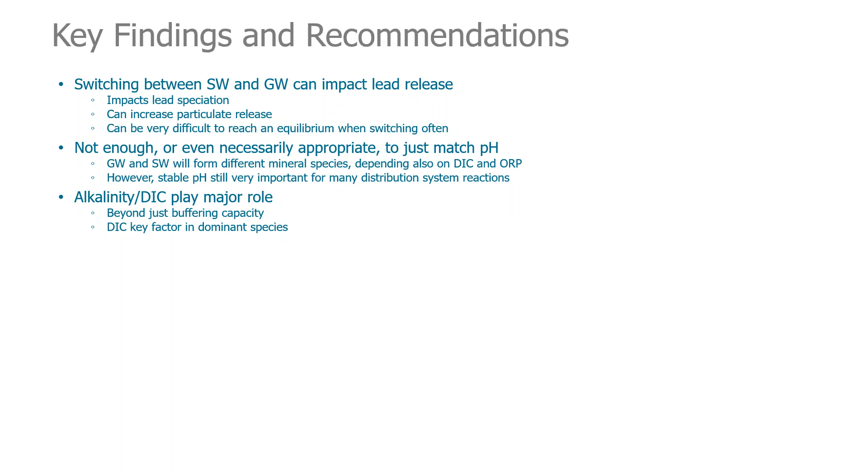I've talked about alkalinity and DIC, but I never mentioned buffering capacity. We have to think of these parameters beyond buffering capacity. They obviously play a major role in which dominant species are going to form in the water. Chlorine residual plays a major role.

We can form some lead-4, that's great. It has much lower solubility compared to lead-2. But since it's very difficult to control chlorine levels within premises, within buildings, after stagnation, we must do everything we can to optimize for lead-2, which is just what we did here with Tacoma. But if we can form lead-4 while balancing disinfection byproducts, maintaining customer acceptance, it can certainly help reduce lead levels.

Multiple tools were used in this study. They all have value, and it's very important to use them all where you can. The desktop modeling, pilot rigs, and scale analysis tied together very well here. There's also bench testing that can be done with coupons that can be very informative as well. We did not do that as part of this study, but it's been a great tool in other studies.

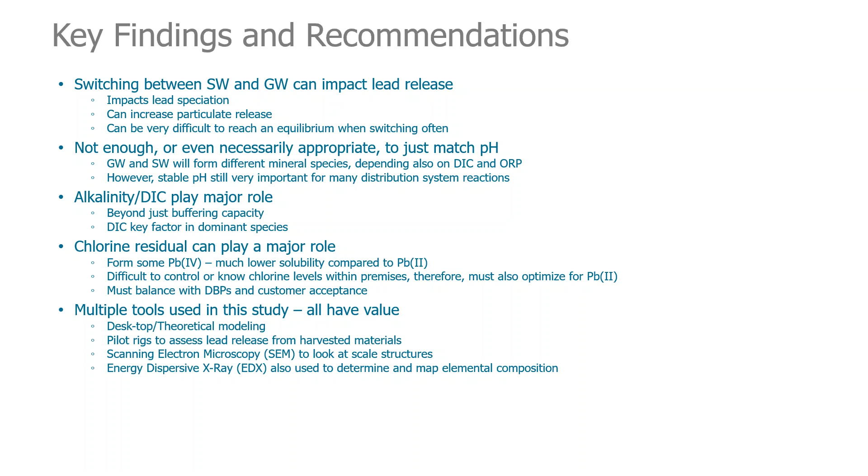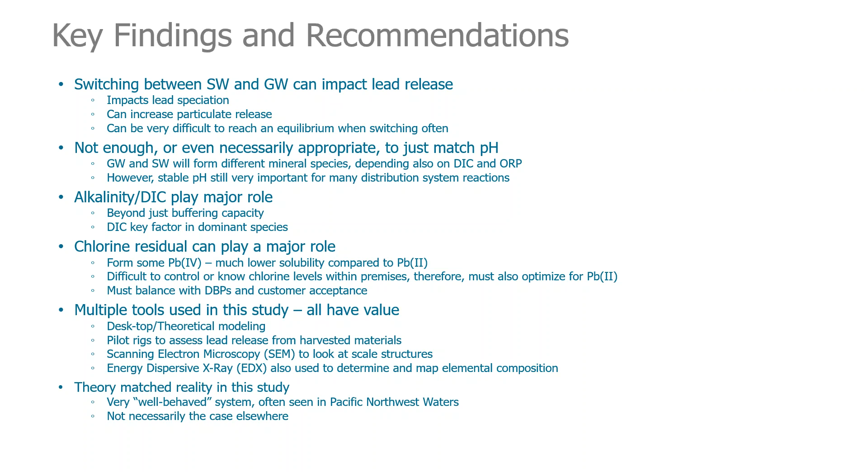For this study, using the carbonate system, theory matched reality very well. This was an incredibly well-behaved system with the carbonate theory. It's often seen in Pacific Northwest waters, but isn't necessarily going to be the case elsewhere. But please use these tools. Let's learn what we can, share results, and get us all optimized. So I thank you, that's the end of my presentation.